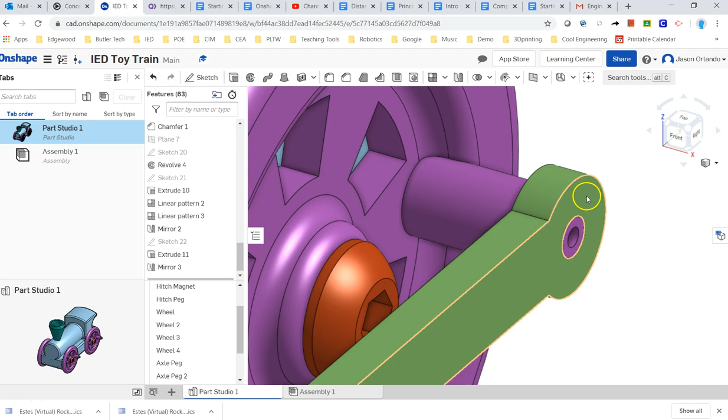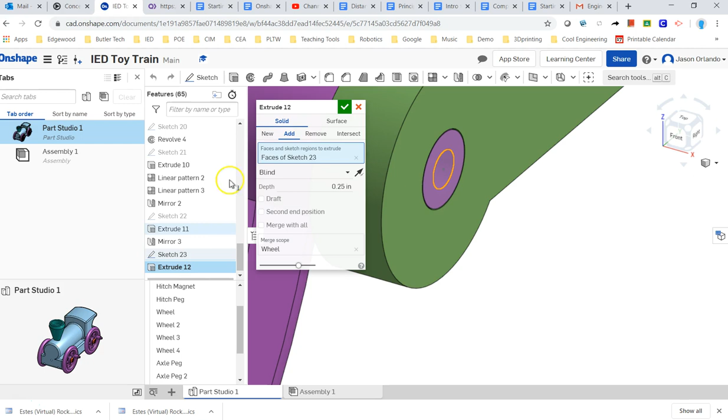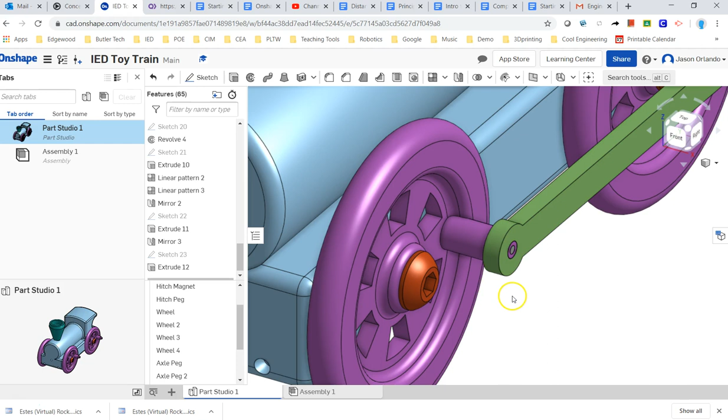Oops. Alright. Let me go back in here, and instead of add, let's make it a new part. Okay. And now I'm going to need to get a plane if I want to revolve that other piece, kind of get a plane that goes right through the middle of that. So if I knew the exact height of that from the bottom of the train body or something, I could do that, but here's just another way.

So I could start a sketch, make a point at the center of the circle, and now I have a point that is directly in the middle, and I can use that point and then the underside of the train body to create my work plane. So I'm going to do a work plane. Instead of an offset, I'm going to use a plane and a point.

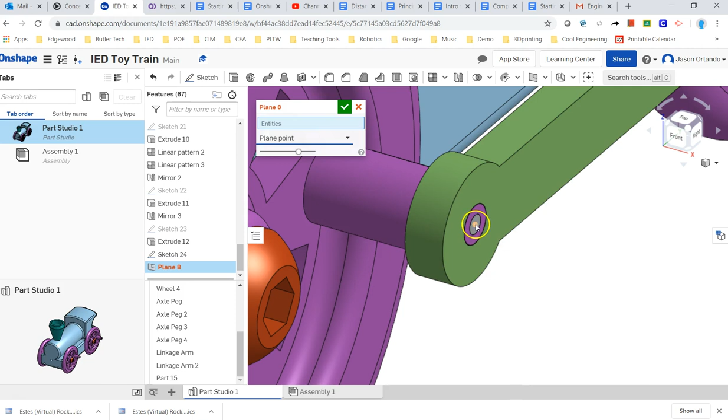Okay, so it's going to be that point, and then that plane. And you can see the work plane now is going right through the middle. I'm going to accept that, and now I can use that plane as my sketch plane. So start a new sketch on here, and there you go.

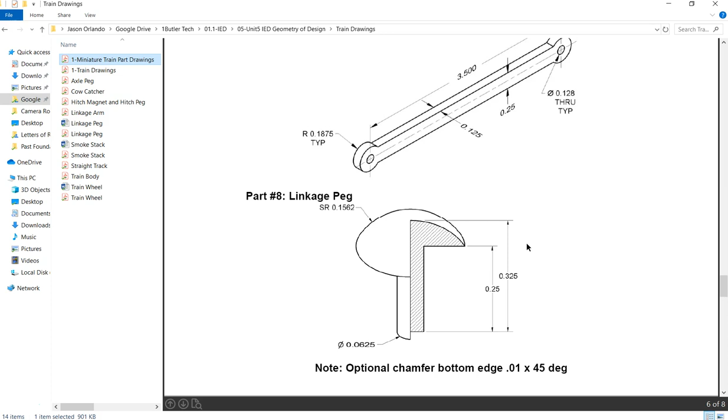Alright, so from the center, let's see, they don't really give me that distance. They tell me I have a spherical radius of 0.1562, but the center of that is not right here. The center of that arc is going to probably be down further. I do know how far out it comes from this face, which is the difference between these two numbers right here. So what is that going to be? 0.075, is that right?

Okay, and then let's add a line coming this way. Let's add a 3-point arc from here to here with the correct radius, which was going to be 0.1562. Okay, see I'm looking there. So let's get that. 0.1562. Alright, now I want to fully constrain this.

I want this to fall in line with the center, what I'm going to revolve around, so coincident constraint might work, because a line represents a line that goes forever. Yep. Okay, so if you think of the line continuing forever, we want it to intersect that point. I just used the coincident constraint to have that point stay aligned to that line.

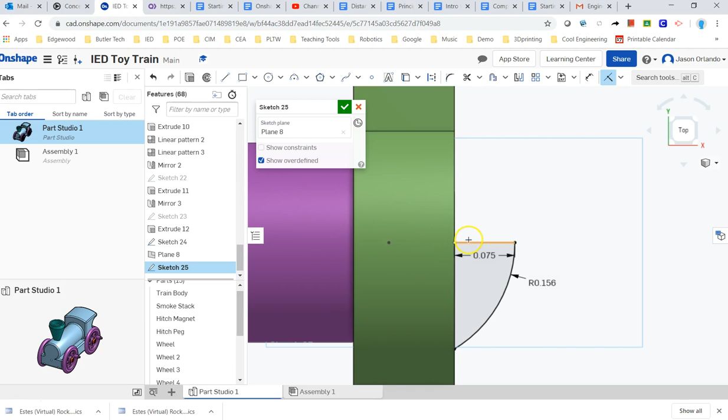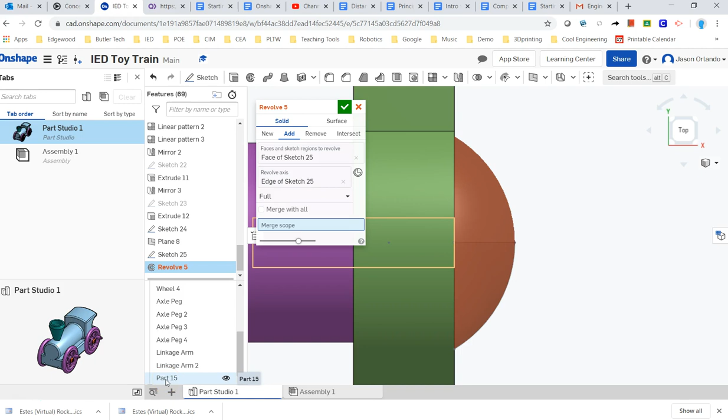And now I will revolve, so I'm going to finish my sketch, use the revolve tool, this, around that axis, and this is going to not be a new model, but we're going to add, the merge scope is going to be that last part we created, and there you go. That now is the linkage peg.

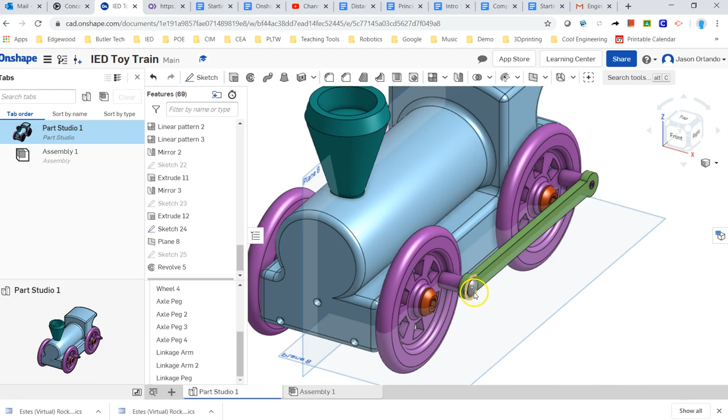Okay, if you want to add inside the part studio the other linkage pegs, so it looks like you have a full assembly. Again, this is not the actual assembly, but we could do a part pattern just like we've done for the wheel and the axles, and so I can do that now. Alright, we're going to do a linear pattern. It's going to be a part pattern, so I'm going to grab that piece right there. The direction is going to be horizontal.

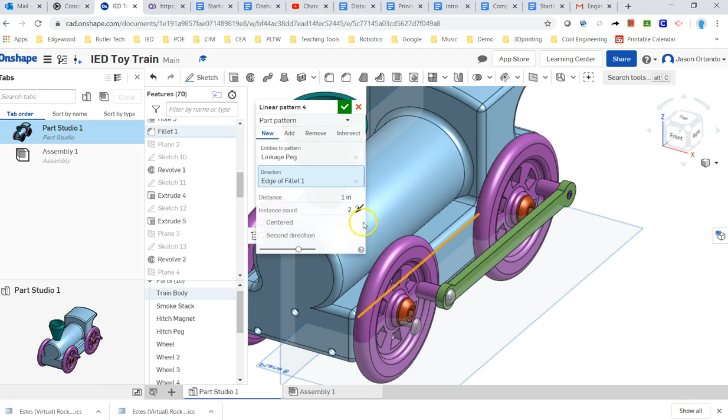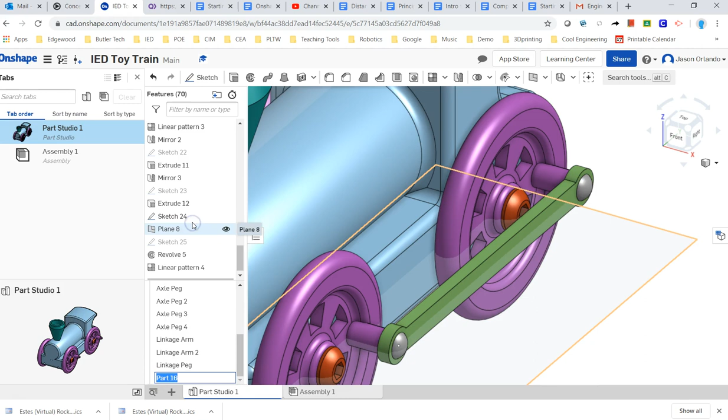Find a horizontal line. There's one right here, previewing it went the wrong direction. I'm going to flip it, and that distance back to there I think was 3.5. That creates a whole new part, which can become the linkage peg 2.

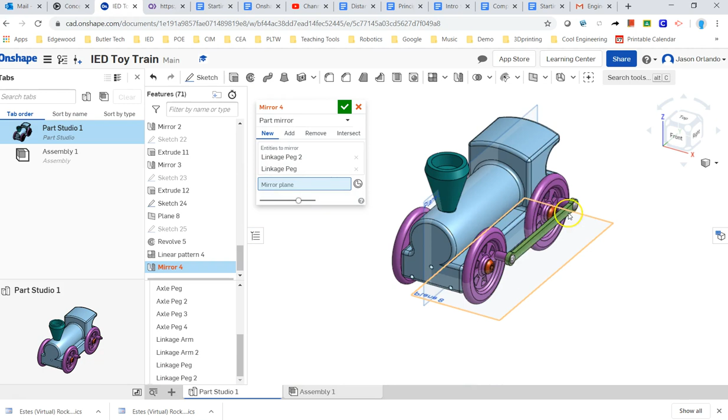And then I can mirror both of those onto the other side of the train. So I can use the mirror tool. Choose the mirror plane. There you go. All right, we're down to one part to go, and that is the cow catcher.